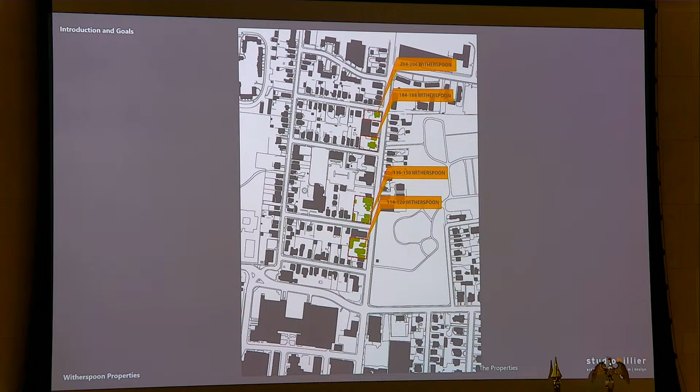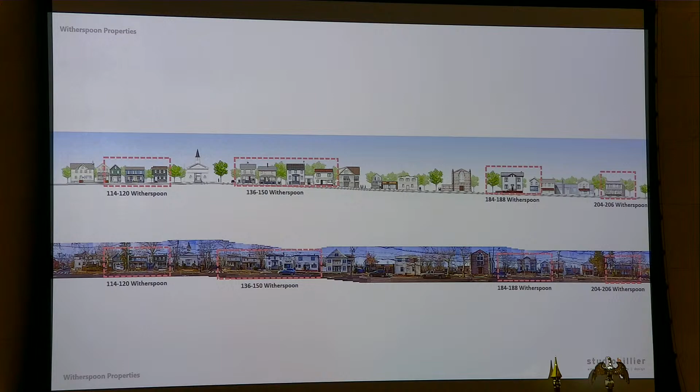This is our basic goals, which is to provide housing at a reasonable cost for the missing middle, preserve the character and culture of the neighborhood, preserve the diversity in the population, provide housing that is in the scale of the neighborhood, and that's a very important thing in terms of the historic importance of the neighborhood. Provide a sustainable and safe environment, provide housing for all ages so that we can have people in their 20s and people in their 70s there, increase the sense of community, and basically celebrate the history of the Black community within the context of the neighborhood. That was what we set out to do last night.

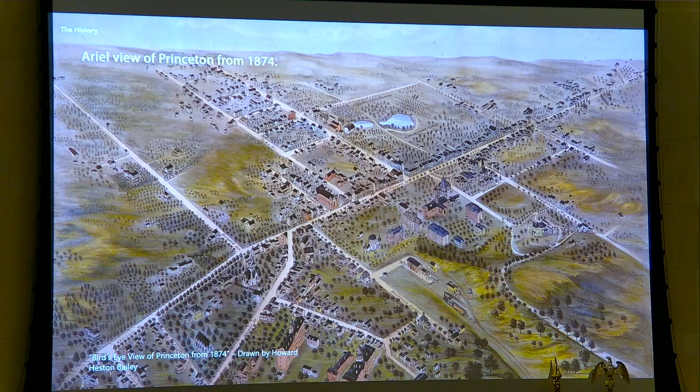This is an interesting drawing. It was done in 1874, and they didn't have drones and they didn't have helicopters. And what you see here is, you can see the Nassau Hall and Witherspoon Street. I wish this... oh, there it is. There's Nassau Hall, and here's Witherspoon Street. It doesn't quite align with Nassau Hall the way it in fact does, but you have to give them a lot of credit. And what's interesting is back then, 1874, this was known as John Street, just as it is today known as John Street.

And what's interesting about this one drawing is that you can see here, this is the neighborhood that we're talking about. And the rest of it is pretty much countryside. And here's the campus. So this has always been part of the campus and part of the center of Princeton. There's Nassau Street. So, and I think I already mentioned John Street.

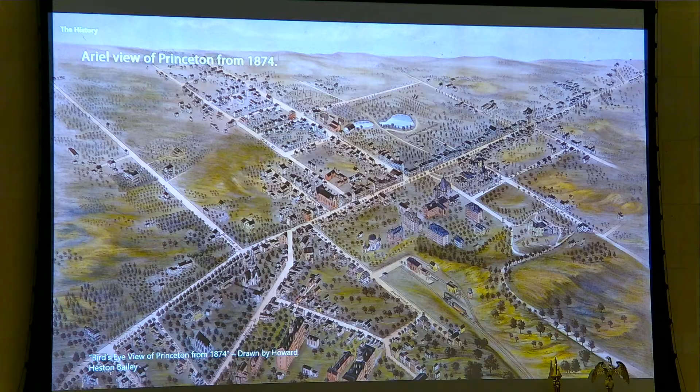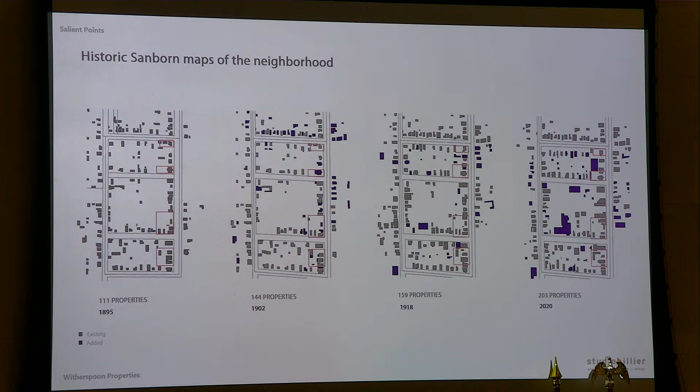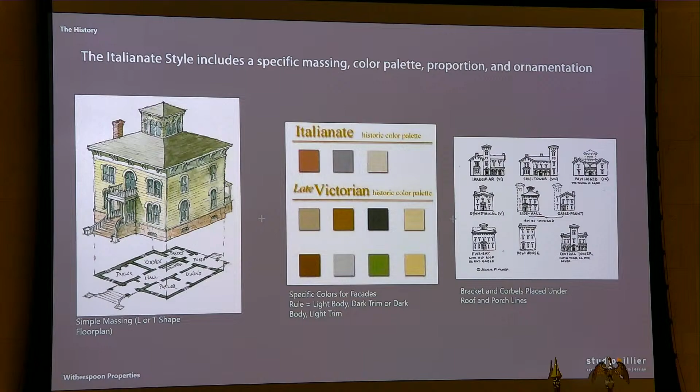She also discovered these books by Andrew Jackson Downing. He was basically telling people how to design different houses in different styles, from country houses to Victorian, and he also gave them color schemes and details on cornices and that type of thing.

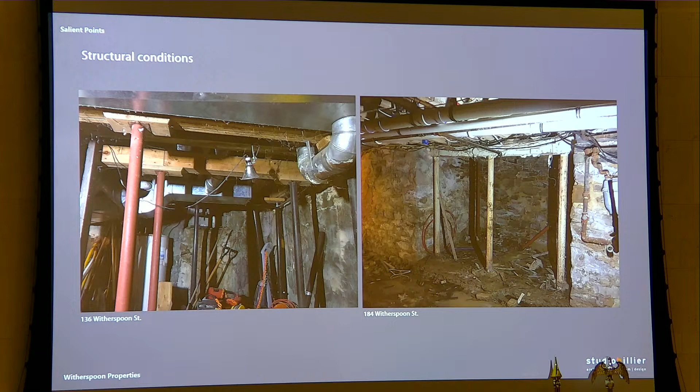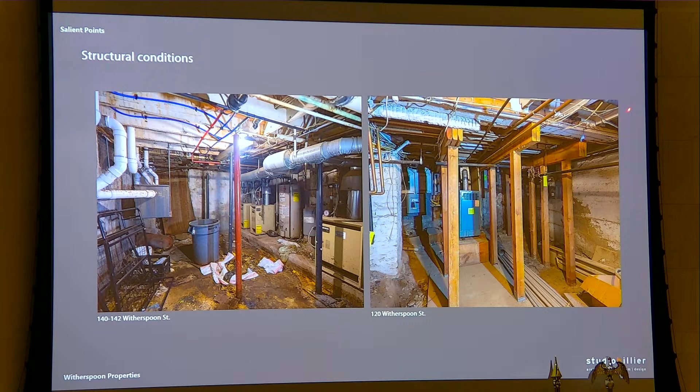Now I'm taking you down into the basement of these buildings. You notice they have dirt floors, and they're very low, and they're literally dangerous and falling apart. A lot of repair has been done to them, but look at the repair — it's all temporary. It's either jacks like this here, or things that have been thrown up. And look at the spacing, how tight it is — that shows how weakened these floor joists are above.

I'll stay away from that, I'm sorry. Okay.

We had a contractor go through and talk about things, and he found a lot wrong, and his recommendation was we should tear everything down and build it new from scratch. That's called reconstruction. For those who don't know, Williamsburg Village was actually a reconstruction done in 1937, so it's 88 years old today rather than the 300 or 400 years old it should be — because it was all torn down and fell apart, and they came back and reconstructed it.

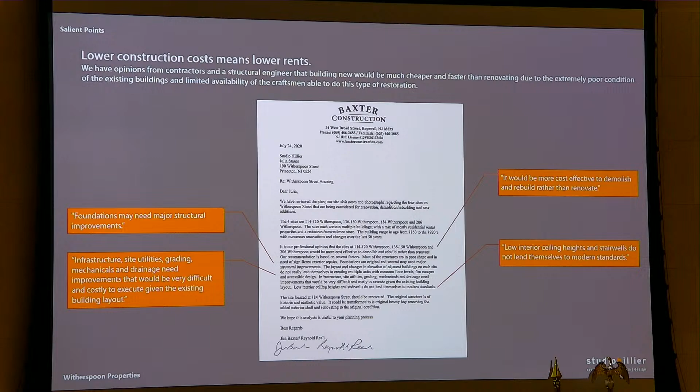Next slide is preservation standards and guidelines. This is important because it's out of the Princeton Master Plan, but it's almost word for word what the National Park Service has done. The reason it's highlighted is we're going to be working in the mode of restoration here. Reconstruction is a depiction, as it says, by means of new construction, of the form, features, and detailing of a non-surviving site. But what we're doing is, in fact, restoring things as opposed to preserving them — they're too far gone for that — or rehabilitating them — they're too far gone for that too. So we are literally picking them up and restoring them from scratch.

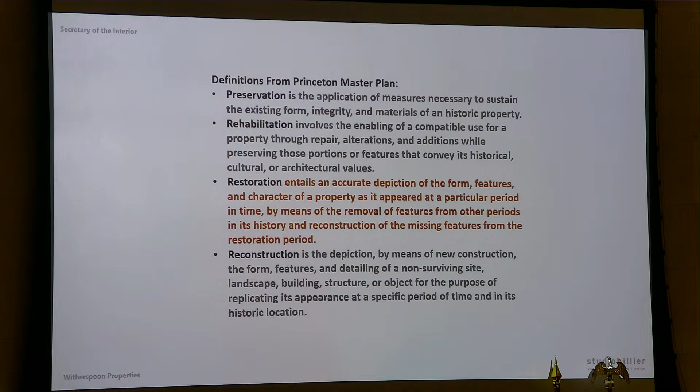We're also detailing the windows — we've measured every single window on the site, and we're doing it so we can imitate these windows in thermopane, as opposed to what we have today: windows that are single pane, often with screens or storm windows on the front, air conditioners hanging out of them, and just not well maintained at all. We're going back and getting the original windows.

When we did the Waxwood, we actually went to New Hampshire and had a special window company make those windows exactly the way the historic pictures of the Waxwood showed them when it was a school. We're doing the same with the doors — these are drawings we've done of the doors, and that's how we're going to get them also replicated.

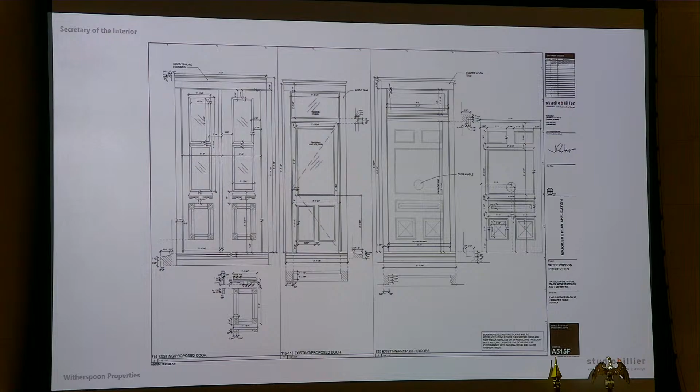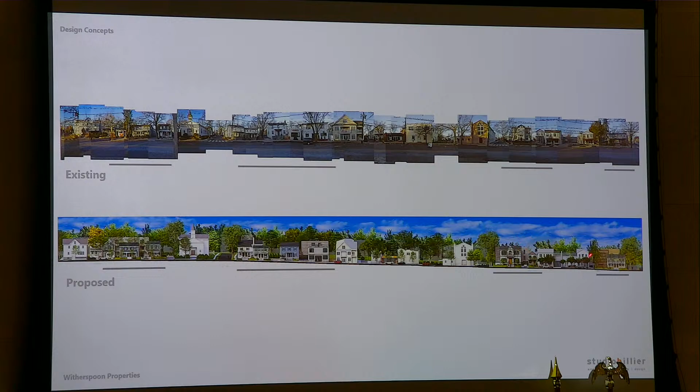The same is true here, and here. This is 204, 206, and this is what they will look like. This building is currently a bodega. The council has asked us to work out a plan whereby we keep all of the retail spaces as retail. We're going to turn it into a soccer store, down the street in our complex, and move the bodega down there because she needs more room and she'll be closer to her market.

And he wants more foot traffic at this end, which is more prevalent at this end of Witherspoon Street.

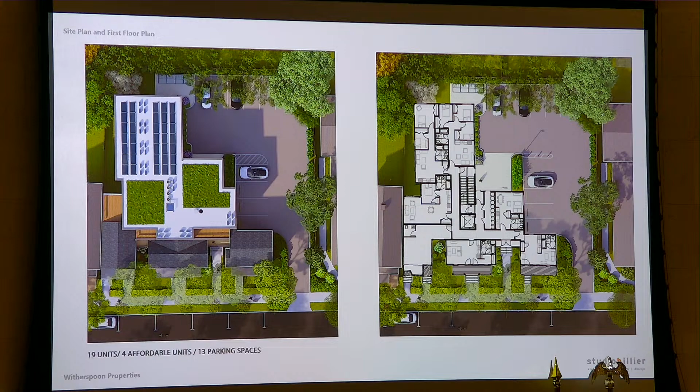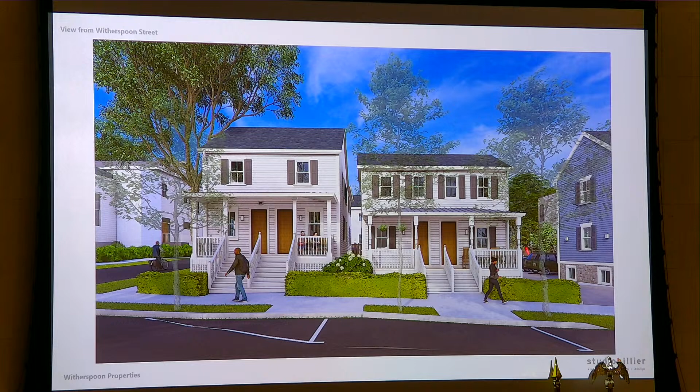Look at the blue building over here - I'm going to take you there now. That's what it looked like with an elegant stairway going up. What we've done is turned it into a duplex here, and at the bottom floor there's a terrible apartment, for which we're creating a new sunken entry plaza into that unit.

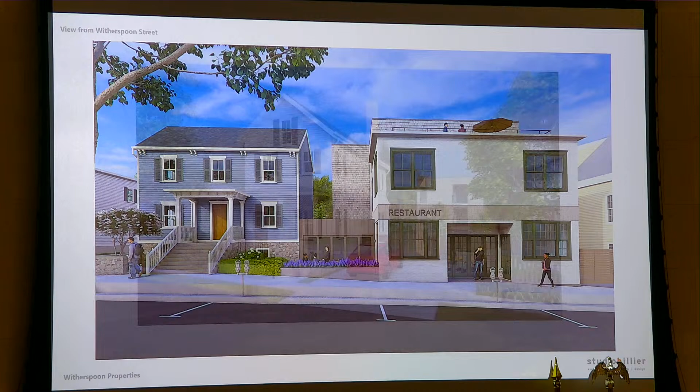Over on Quarry Street, there's one house there which we're going to restore and make it look like this, and it has a parking area for 2 cars.

You notice this here, that's something Shirley Satterfield has been advocating, and it's basically the first community garden to be going in, and it's here. And what you're also looking at is the big building with 20 new units in it, and then there's another 5 or 6 units in the rest of it. So there's a total, I think, of about 25

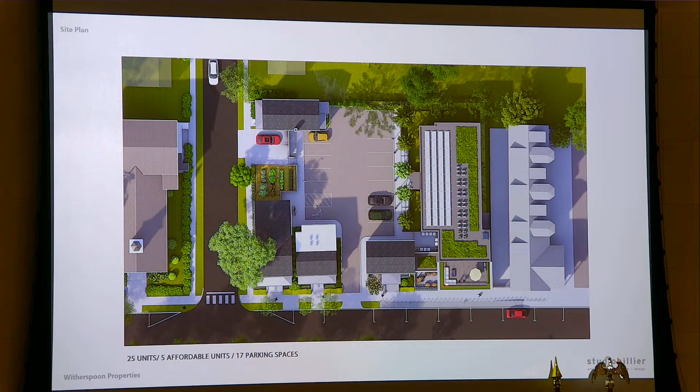units in there. Now, this is a site plan of that, and you can see you go in here, and there's the parking, and there's the little house on Quarry Street, and there's the community garden, and then here we have the usual array of solar collectors and sod roof, and then here we have a rooftop gathering spot for the occupants of that building. So they can have a party or a barbecue there.

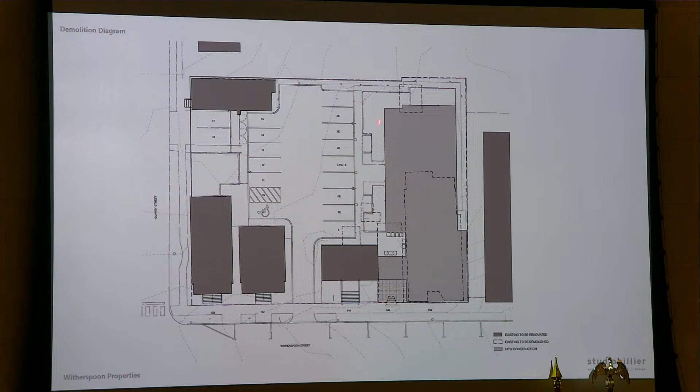I'm trying to move along here. Now, this shows the buildings that we are tearing down or removing are all dotted, and what we're adding is shown in gray. And this is the school, which is being converted into apartments. It's been converted into apartments, and we're extending that with more apartments.

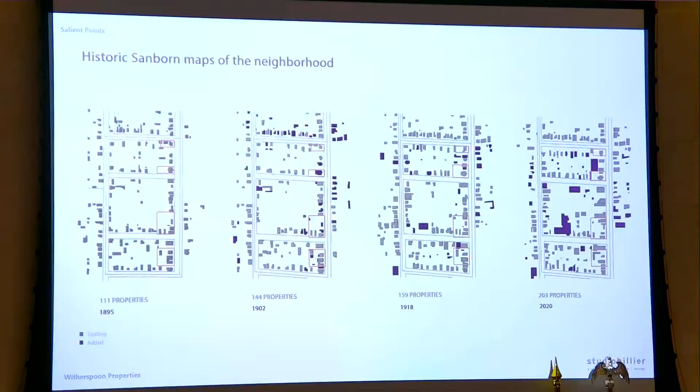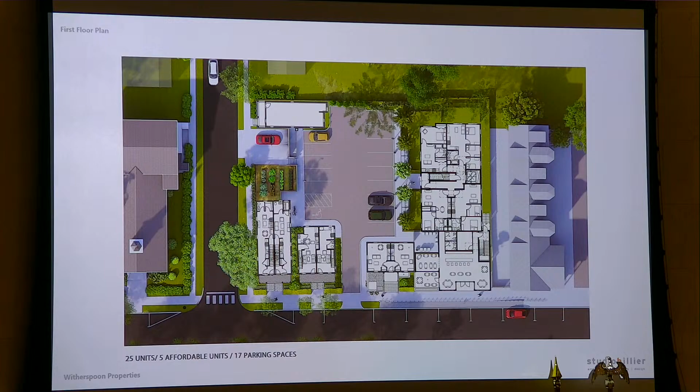Okay, now I want to go back one here and explain something. You see this little single-family house here? That's what it looked like originally, and our intention is to put the porch back into its original condition. Right now, it's a glassed-in porch, and that's what we plan to do, and completely restore it. And it's an affordable unit for a family.

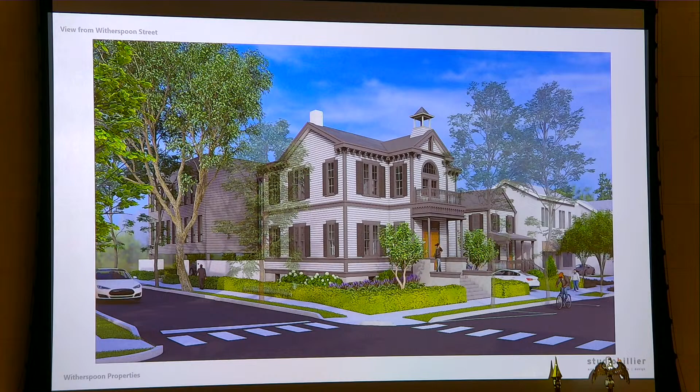You see the parking here. Based on our hearing last night, what we're doing is we're taking a bike stand that was there, and we're putting a bike stand here, closer to the sidewalk, and equidistant, frankly, to the entrance to this building, which is back underneath the parking area. And that lets these cars get up and out of sight, which is an important factor. Because this is a family-occupied building, we are stacking the 2 cars in there as opposed to it being a garage.

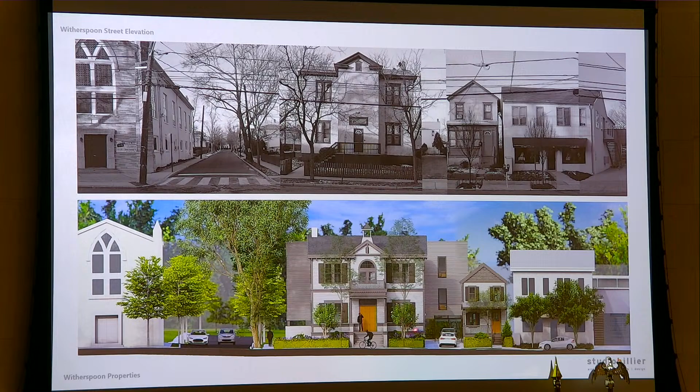And here you see what it looks like today and what it's going to look like in the end. And you notice how we've used a very quiet gray siding on here. And the next slide is showing you the side elevation. And there was a reaction last night to this looking, quote, like an office building.

And so we're replacing all of these walls with landscaping, and we are breaking the scale of this down into the scale of the housing on the streets. And so we'll be back when we get to the planning board with a redesigned version of this. We're going to have windows that are scaled like this, and we're also going to break this down so that each one of these are more the scale of a house, and maybe we'll have a secondary material, maybe this actual siding here, as part of the breakdown of this into.

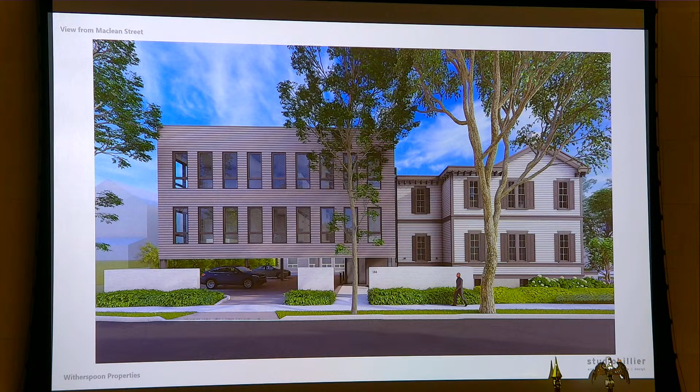This is going to look at the end of the day like 3 new houses, as opposed to the big building that it looks like today. And the windows are going to be scaled more like these windows. So we're working on that right now based on the input that we got last night. So come to the planning board and you'll see it.

And this is the original building, the usual array of sod roof and the solar panels. And this is what the building looks like on the first floor plan.

And what we've done here is we've torn this part down and are replacing it with 2 stairways and an elevator so that the people who come into the entrance here can take an elevator and get into this new building here, but they can also get off and get into the original building there, and the stairways also serve each of those buildings. Next slide.

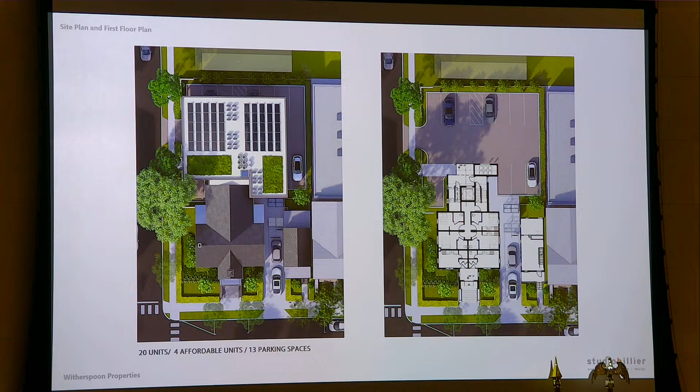And here you see the addition that we're doing, and this is the original building. I have to tell you, these rooms in here, since it was an old school, it has 12-foot ceilings.

Those 12-foot ceilings enable us to put in a brand new bathroom and then a sleeping loft on top of that bathroom. And yet it's still a 12-foot high ceiling, so the living part where the kitchen is and everything else feels very good, because even though it's very tiny, it's actually very tall. You don't feel that at all. That 12-foot ceiling gives us great advantage.

The 12-foot ceiling, incidentally, comes from it being originally a schoolhouse, and they didn't have air conditioning, so they had to make the ceilings high just to get rid of the hot air.

The other thing we're doing here on all of the buildings is we're air conditioning them completely, and we're putting all new plumbing in and all new kitchens in. So even though we're densifying it, we're enhancing it, and we're also putting sprinklers into all the buildings so that there will be sufficient fire protection.

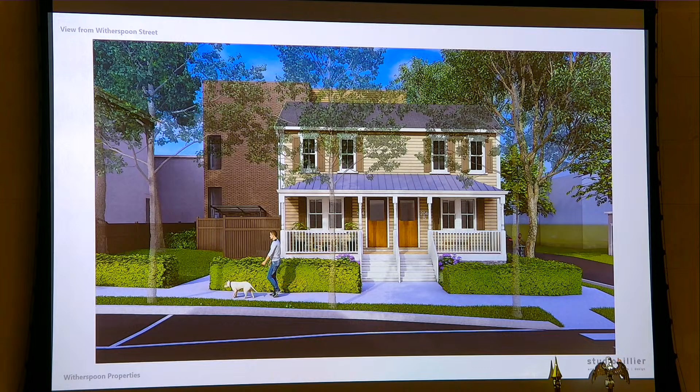This is the last project. This is 204 and 206 Witherspoon Street. Right here on Lytle, there was a 4-foot addition that went out and was built into the right-of-way, so the sidewalk had to go around it. It's totally illegal. We've removed that, and we're restoring this building. Then behind it, we're building another addition done in a very quiet brick and siding. This color toning here is to go with the original color toning of the house.

We're doing the same thing I just described on the previous lot. We're breaking this down, so it's going to look like 3 houses, and it's going to have all landscaping along here so that you won't be looking into the garage. But what we have down here is the appropriate number of parking spaces and an entrance that takes you in.

Here you see the corridors serving this building. And the fact of the matter, look at this ridge and look at this here. If you go over across the street and look up, you will have a hard time even seeing the height of this building, and yet we're dropping the height of all these buildings by about 18 inches.

And this is showing that unit. We don't have a sod roof on this one, but we have a lot of lawn that we're keeping.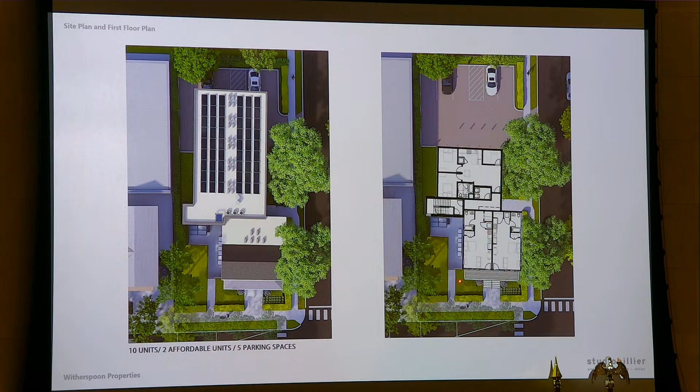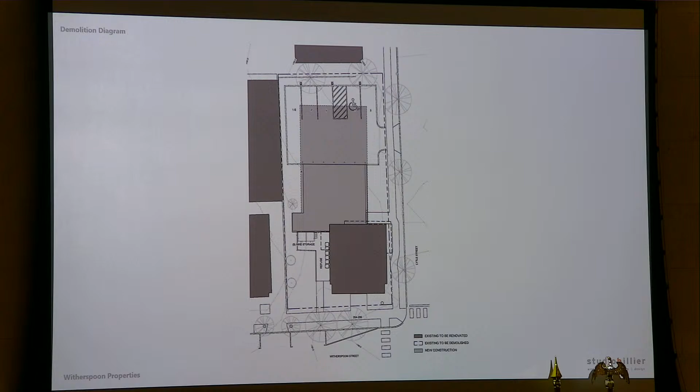This shows you what's new and what's old, and there's no demolition, or the only demolition here is, you see how the sidewalk came and went around that funny little addition, which actually had a bathroom and a kitchen in it, which means it was probably installed when we started to have indoor bathrooms.

That completes the presentation in a hurry, and it wasn't probably fast enough. Oh, thank you so much.

So we were discussing, deliberating our reaction to the proposal, and we had gotten comments from the board and from the public, but I want to give an opportunity, if there are people in the audience who didn't get a chance yesterday to speak, if anyone here today would like to speak at public comment, you're welcome to now.

Oh, come on and we'll swear you in.

Yes, good evening. I'm Tony Vaselli. Sorry, can you just raise your right hand? We have to swear you in. Do you swear that the testimony you're about to give this evening is the whole truth to the best of your knowledge? I do. Thank you.

I'd just like to make a favorable comment. I'm also an owner of some rental units and have to endure numerous inspections and revisions, usually for pretty mundane things. So I just find it unbelievable that these units he's talking about now are still rentable or occupied. They really should be knocked down. The amount of effort he's putting into improving the property is fascinating, and I totally support it. To me, trying to save them is going to be incredibly expensive. Every property he's redesigned is 1,000 times nicer than what we have.